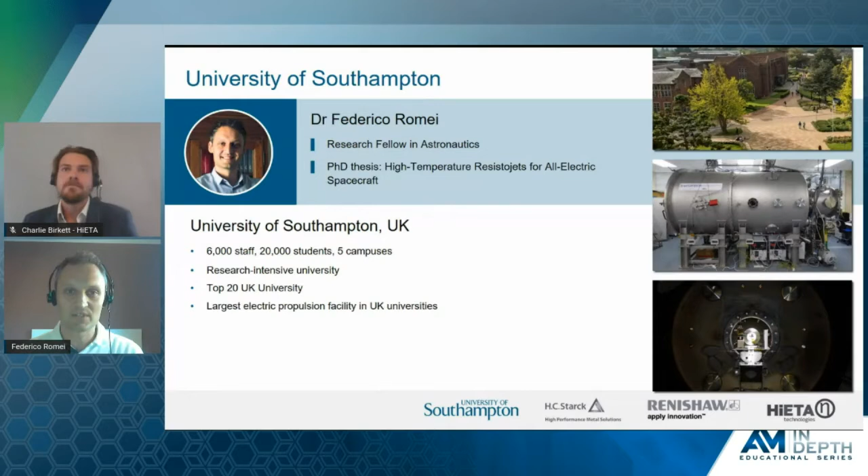Okay, so still Federico here. I'm going to introduce myself very briefly. So I am a research fellow in astronautics at the University of Southampton. As I said, my PhD thesis was on high temperature Resistojets. In particular, we looked into all-electric spacecraft, which is a kind of satellite platform.

The University of Southampton is quite a big university, in the top 20 in the UK. There are above 6,000 staff, students are more than 20,000. There are 5 campuses, one in Malaysia and the other in the city of Southampton. The good thing about the University of Southampton, from my point of view at least, is that it is very research intensive, and we have some of the best capabilities and facilities in the UK.

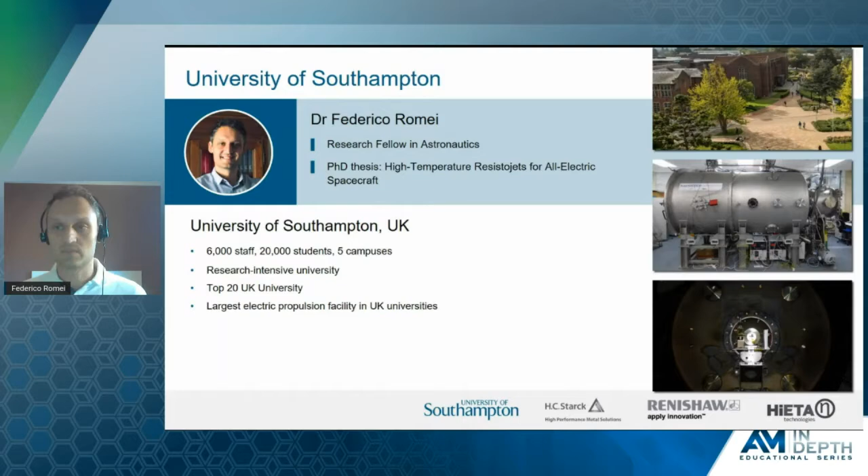In particular, we have the largest thermal vacuum chamber in the UK, which is the one that you see here on the right in the center. And this really is the kind of space simulator that we use to test and qualify the Resistojets, and not just those ones, but also other electric propulsion systems that we research into in our research group.

So here, I just want to tell you why electric propulsion, so why Resistojet. Simply, electric propulsion allows you to have a much lighter platform, which means that the launcher has to launch into orbit a much lighter amount of mass, which is cheaper.

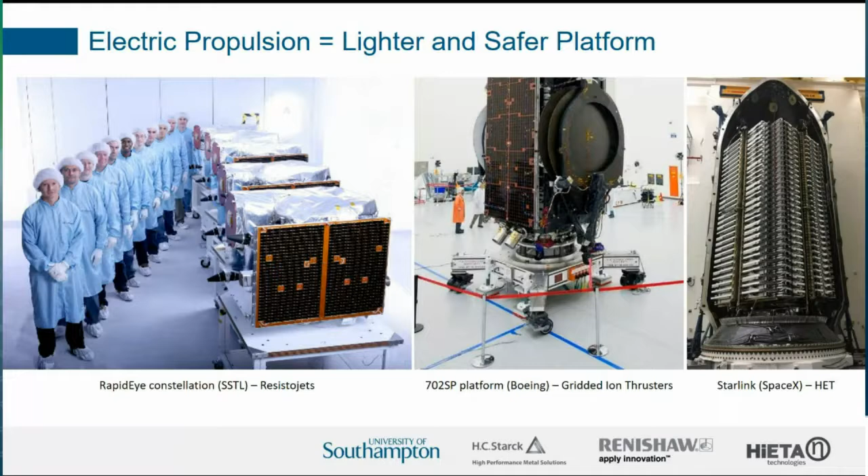Okay, so electric propulsion came into play already really at the beginning of space commercialization since the 80s with the Resistojets. So here you can see on the left an example from Surrey Satellite Technology, which is also a partner of this project. They have a very long heritage with Resistojets.

So here you go with the constellation from Surrey Satellite. At the center, you see instead another example of electric propulsion, in this case for a much larger platform for geostationary. This is from Boeing and uses another electric propulsion technology called gridded ion thrusters. On the right, you also see another example of implementation of electric propulsion from SpaceX, the Starlink constellation. In this case, they use another technology in electric propulsion called the Hall effect thruster.

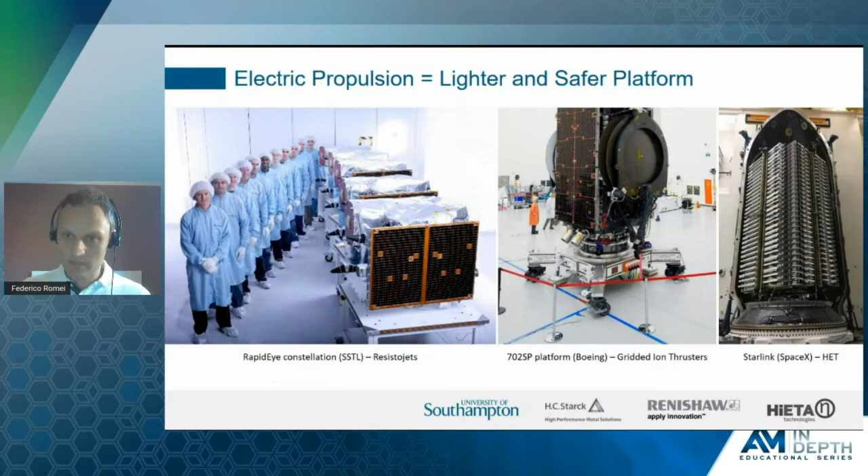But now we need to focus on resistojets. So why do we want to print refractory metals? Because they can achieve very high temperature, and in the resistojet world, high temperature corresponds to high performance.

So if you look at the equation here, this is the equation for specific impulse, which is like the performance, the speed of the system, the performance parameter. Once you have, like here, there's gravity, here's the specific heat of the propellant, and here the molecular weight. So if you consider just one single propellant, then the only way to increase this performance is to increase the temperature.

So really, it is very simple to think that you can increase the performance of a resistojet by just increasing temperature. In particular, from what SSTL, our partner, has achieved — they can get to 800 Kelvin of temperature — we wanted to achieve much more, like beyond 2000.

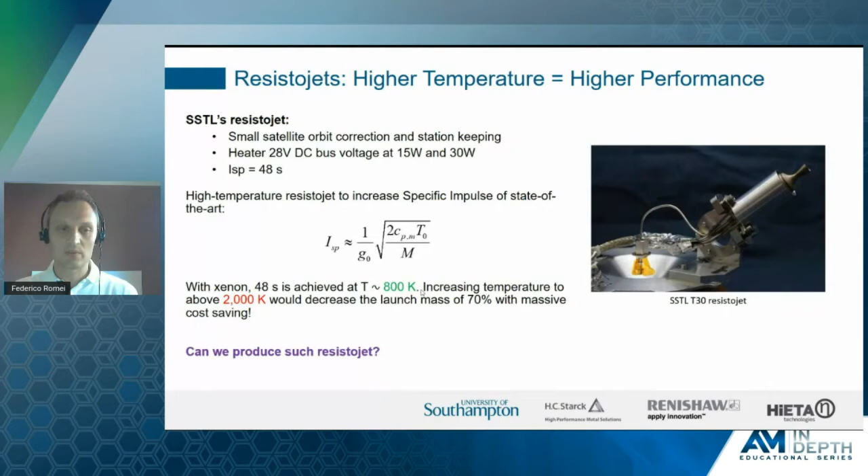In this way, we can really reduce the mass of the spacecraft by 70% and have massive cost savings. So now the question is, can we produce such a resistojet?

As I said in the introduction, we found a very interesting design in literature from the 60s and 70s, from a company that was collaborating with NASA on developing a very high temperature resistojet using hydrogen. The concept is pretty much what you can see here.

What I've done during my PhD is to simplify the manufacturing process using additive manufacturing. So this is the heater that you can see here, the first prototype in stainless steel. Basically it consists of a number of tubular elements that are concentric, and these are interconnected with some features inside, and this forms an electrical resistance.

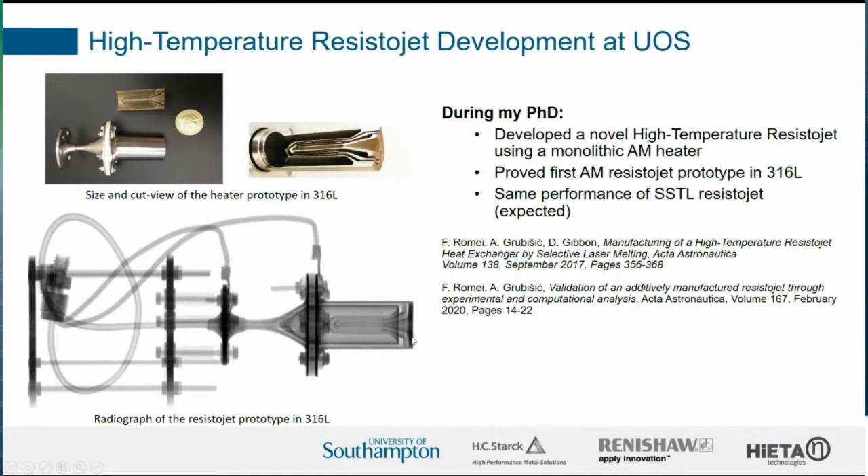At the same time, you have the propellant, and you can see here from this radiograph that the propellant flows from the outer part of the resistojet and then recirculates inside thanks to these tubular concentric elements. Then it's heated by the resistive heating, and at the inlet of this trumpet nozzle, you have expansion of the gas, and this produces thrust. So we have been able to make a prototype in stainless steel to demonstrate it.

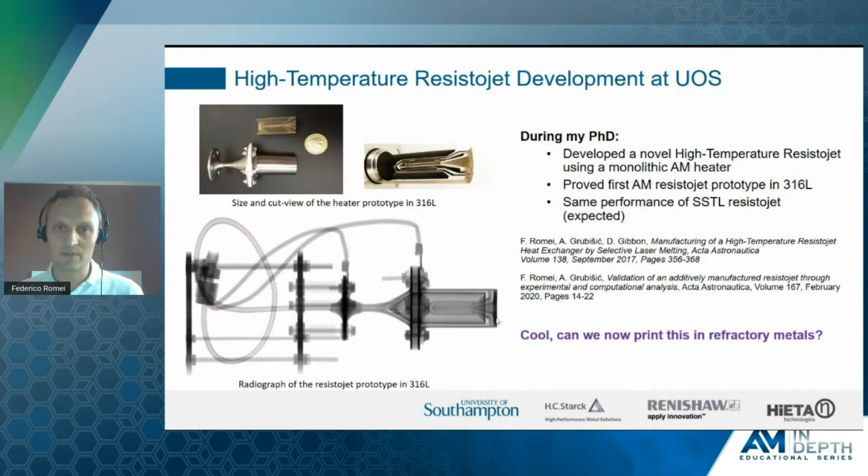But then the next step was, can we use refractory materials? Can we really achieve the goal of above 2000 K temperature?

To do this, we built this consortium. Angelo made this possible with a project of 2 years funded by the UK Space Agency called Super High Temperature Resistojet for All Telecommunication Satellites. The goal is to design and test an engineering model of the resistojet, moving from prototype materials like stainless steel to refractory metals.

The consortium is formed by HC Starck, that provides the refractory powders, then HiETA, that has Renishaw technology to print these refractory metals. We provide the designs, and effectively we also do qualification and testing of the resistojets. We also have Surrey Satellite Technology in the consortium, which provides us with real mission requirements for the platform, and Satellite Applications Catapult, which provides us with standardization and secure supply chain strategy.

So in order to do this, the first thing that we need is refractory metals. And here I pass it to Paul.

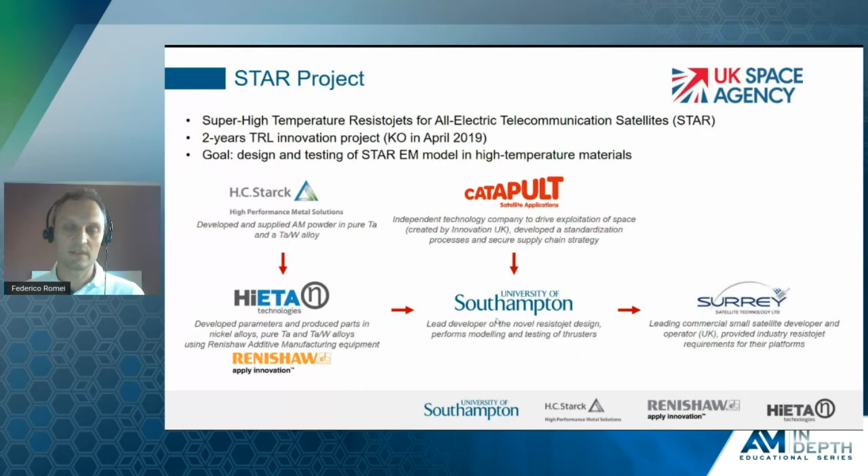Again, my name is Paul Aimone. I'm a senior engineer at HC Starck's Newton facility in the United States. I've been working here for roughly 21 years, so I have a great deal of experience with refractory metals in these types of applications.

Traditionally, Starck is a supplier of refractory metals in traditional forms, and we've been working on additive manufacturing components and powders for at least 7 years now. We supply all the refractory metals, tungsten, molybdenum, tantalum, and niobium in powder form. We have global resources to help us with the distribution of the powders, specifically for this program, to get them over to HiETA for the powder building in their systems. And we have extensive support facilities, both in research, R&D, and other traditional processes for the refractory metals.

But now I'm going to move on to the objectives of this program for our company and for the program itself. Overall, as Federico has indicated, improving the performance of the resistojets, reaching the goals that they have, is going to require refractory metals. So one of the big goals is to develop a new alloy.

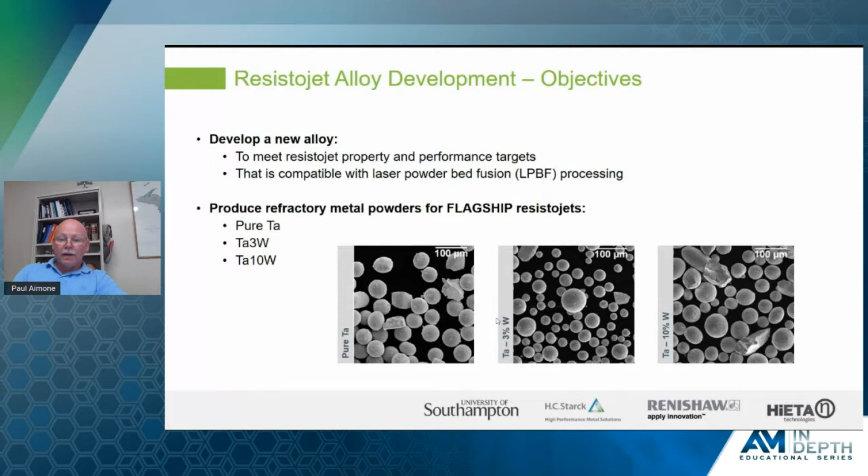So we need an alloy that operates at very high temperature but is still very strong, because there are mechanical stresses involved from the firing of the Resistojet, plus thermal cycles as it goes from operating temperature down essentially to zero due to the very cold temperatures in space.

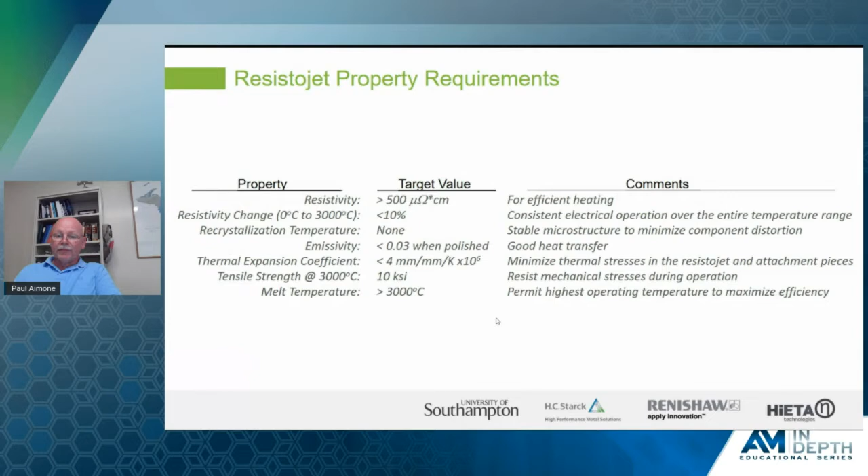However, there are two: the tungsten 4 rhenium alloy and the T222. The latter is a tantalum tungsten hafnium alloy. These show the most promise as a starting alloy for further development.

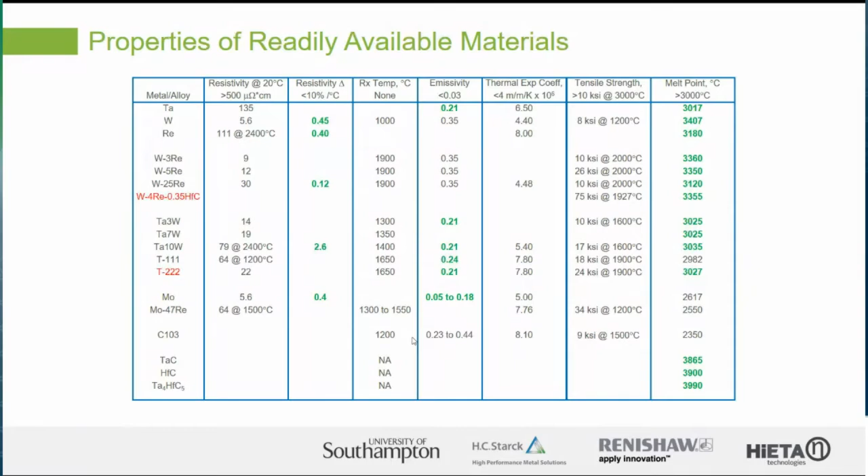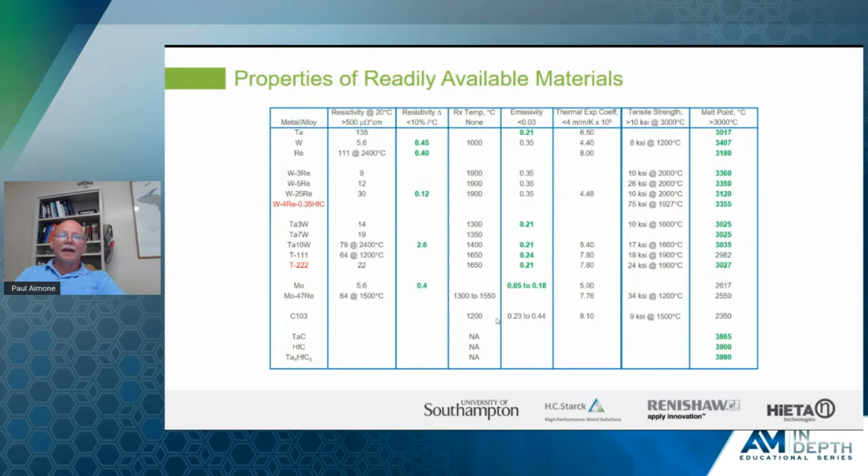For those familiar with AM or powder bed processing of tungsten, you'll know that's very difficult—there tends to be a lot of cracking. And we'll see shortly that it's much easier to produce solid components in tantalum. So there we have a competing set of requirements that we're hopefully going to work our way through to give a Resistojet in the highest performing refractory metal we can.

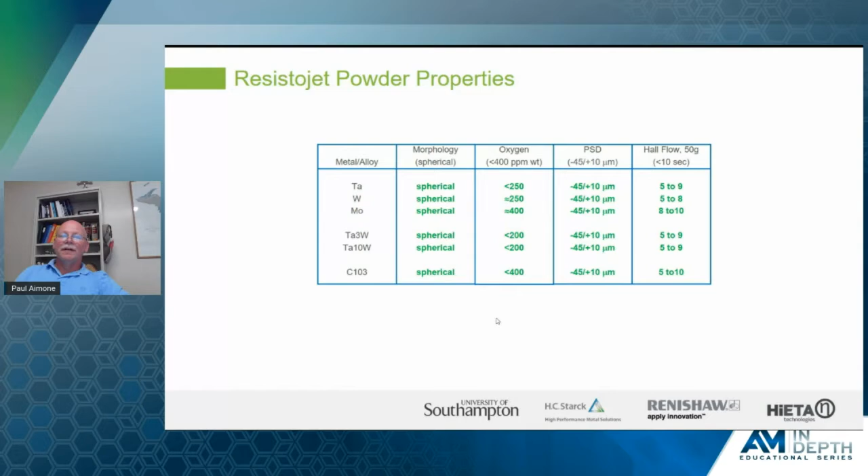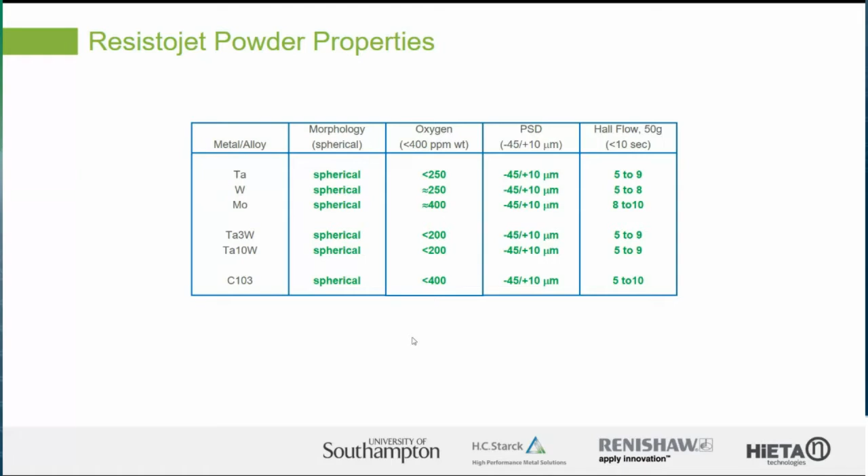For the program, as I said, we make many refractory metal alloys. You can see the requirements we've put together for powder bed laser powders, based on industry requirements. We really have no trouble producing any of the alloys listed, and would be able to supply any of these and offshoots of these for the project itself.

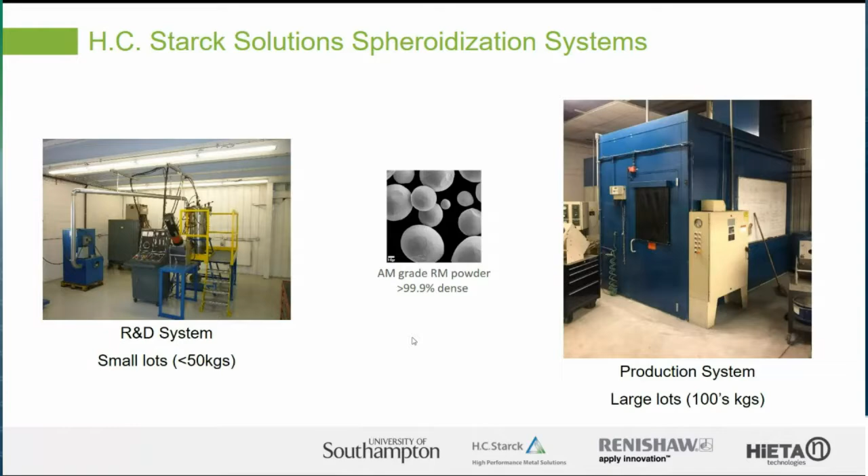These powders are produced internally. We're using two systems to produce powders for this program. We have a small R&D system which can produce small lots and specialized powders—a lot of the work has been conducted on that unit at the moment. And we've brought online a larger production unit to supply much larger lot sizes when we begin producing Resistojets in larger numbers.

So having the powders, we can then use these in the AM environment, and John Laureto is going to talk to you some more about that right now. Sure, thanks Paul, much appreciated.

So guys, as Brent had alluded to, I function as the Additive Manufacturing Group Americas Operations and Applications Manager for Renishaw Inc. My background is in material science and engineering. Functionally, I've been in metal additive for probably about 6 or so years. I started on the service bureau side and then migrated over into the equipment manufacturer side.

So pretty well versed in the technology overall from a user and manufacturer's perspective. Renishaw is quite unique relative to some of the other equipment manufacturers out there, in the sense that if you look at the company's history, we have a core competency in the design and manufacture of precision metrology equipment. That comes across in other areas of our business outside of additive—things like our CMM, machine tool, and Equator divisions, which are typically more leveraged in the subtractive side of the business.

But I'll get into the additive stuff and where those two touch up in a little bit. We also have expertise in optical-based measurements, which comes into play with things like our laser interferometers for precision machine control and alignment. That's mostly for subtractive technologies, but it'll come full circle again.

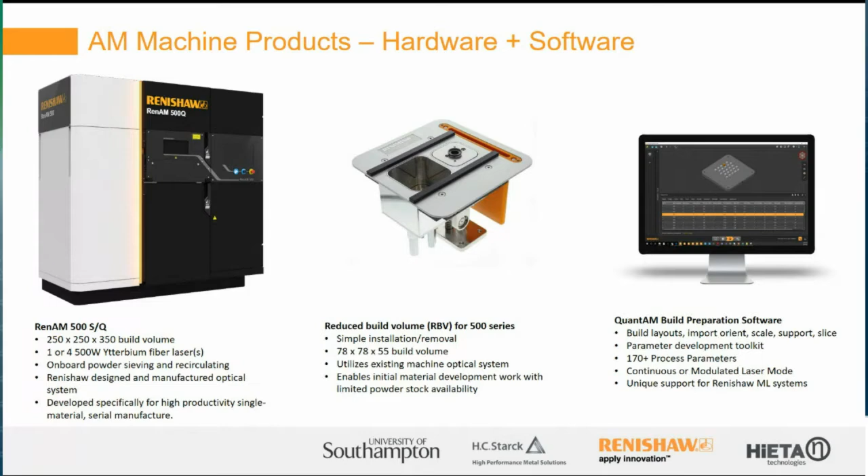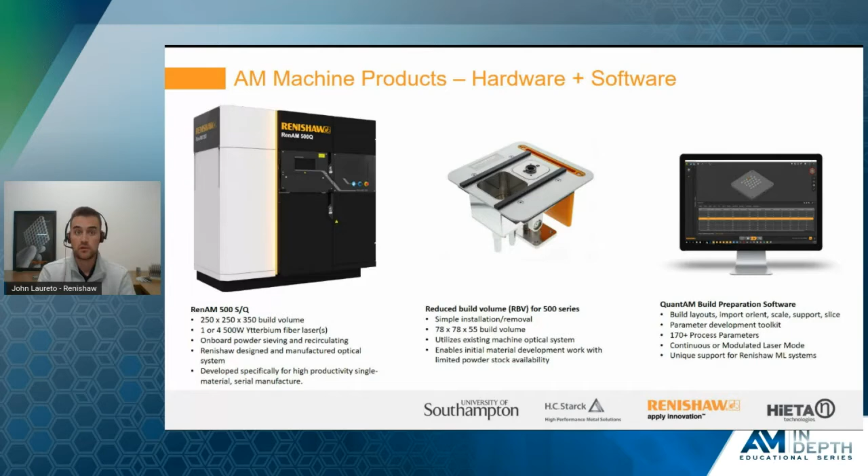And they can functionally leverage this tool, the tools within QuantAM, to manipulate any build processes they may need to work with to help develop the system, the alloy, and even the design in some circumstances. In conjunction with that, it also offers some clever utilities for multi-laser assignment, which can get interesting relative to metallurgical control, especially with refractory alloys.

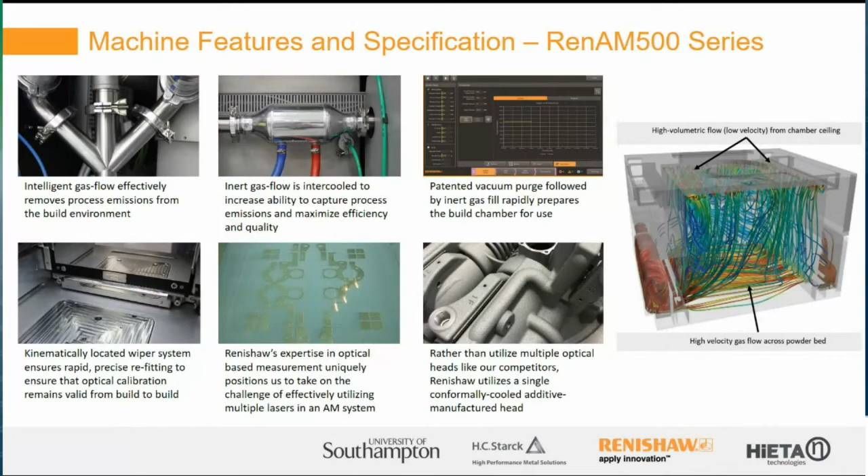There's an air knife that rides adjacent to the build platform, which helps evacuate and remove all that spatter, condensate, and other particulate media away from the system. That gas flow is inert, typically leveraged with argon gas, but it's also intercooled, maintained nominally at about 20 degrees centigrade. This allows us to maintain good thermal stability of the platform, and generally speaking, things condense more readily in cold air versus hot, so that's a good little thing.

The system itself also has a vacuum purge. To fill the vessel by itself is about 1,000 gas liters, but it would obviously be substantially more to push out all the air in the chamber during the prep process if we weren't to have a vacuum pull down prior to introducing any argon into the chamber. So that's pretty clever from a runtime capacity. The machine can be ready to go in about 10 minutes when you hit the go button, down to even like 500 ppm or less.

One of the more clever things, and these even harken back to some of the stuff we've done with all of our other industrial metrology products, like our touch trigger probes, is they're all based in the science of kinematics, kinematic loading and unloading. The wiper blade in our quad system is similar to that. It would be the same in both the RBV and the full scale platform, in the sense that there is no operator intervention relative to leveling the wiper system. The optical control and the leveling of the optics are based upon a hard-coded position based on where the kinematics are located. So the wiper mechanism itself can be loaded and unloaded with a couple set screws, or springs rather, so it's a very quick turnaround process for the operator.

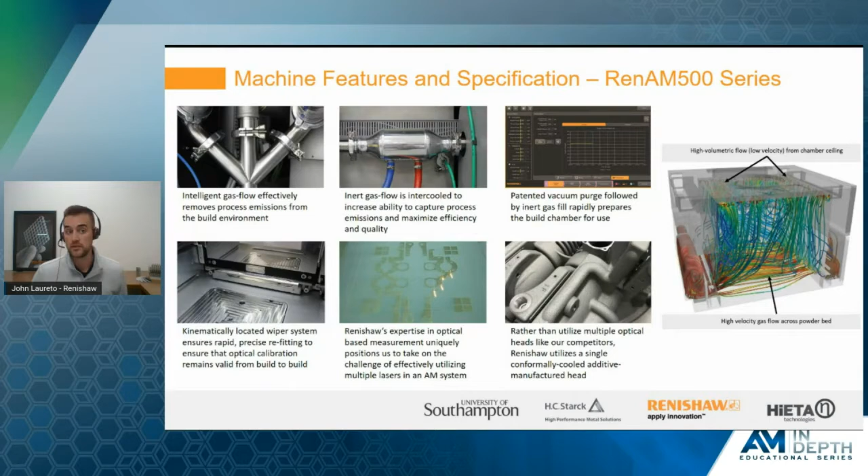And then the last two images there, functionally, like I said, we do design and manufacture our own optical module. What that has allowed us to do basically is have all four of the lasers in the quad version of the system isolated very close together, which allows us to maintain the same optical temperature across all the lasers. And moreover, there's no stitching phenomena relative to their addressing of the bed platform, because each of the lasers can address any portion of the substrate at any given time based upon the output demand that you program into QuantAM, which is a software I'll talk about next.

So much like a lot of build setup softwares, QuantAM does a lot of the pretty basic things relative to metal additive, what you would expect a slicing utility to be able to do. You can import, orient, scale, label part geometries as you import them into the software. There's a couple of utilities built into the functionality of the tool for support generation. QuantAM will leverage what's called column supports, a pretty common node-to-node type support generation based upon overhang threshold limits that you define within the software. You can kind of see some contour maps of that shown in the upper middle image there.

And functionally, once you do design the build layout, it starts to give you a few more clever tools associated with how much exposure cross section you're going to have per layer. Therefore, that drives how much laser on time you're going to have per layer, which allows you to start to think about this in a bit more holistic manner relative to manufacturing efficiency, laser on time versus wiper on time. And even things about abrupt cross-sectional changes, which will drive thermal histories, which can lead to things like cracking phenomena or shift lines in the part.

One of the more powerful tools, that Charlie will touch on later in the presentation, is the developmental protocols built into QuantAM. Its bread and butter, in my humble opinion, really is its ability to rapidly iterate between parameter sets and any developmental protocols for new alloy systems. There's over 170 parameters within QuantAM. The common five are power, hatch distance, exposure time, layer thickness, and point distance, relative to how you excite the laser onto the bed.

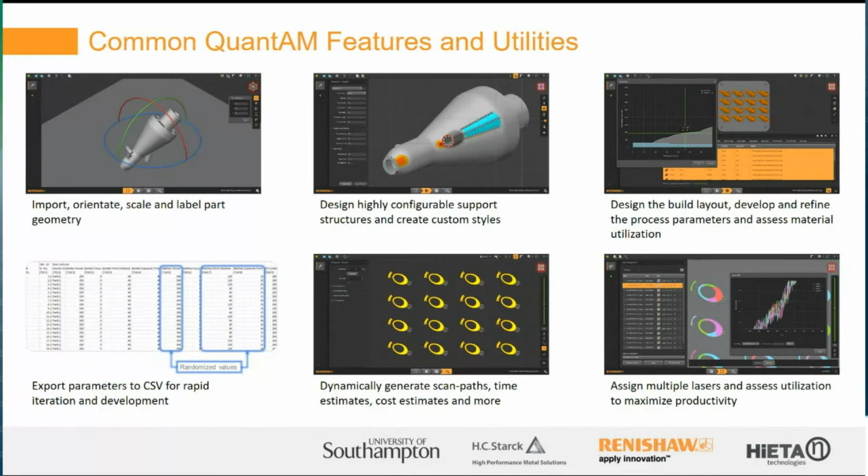Once the parameters are defined, you can create scan paths relevant to the parameters you defined. It's either going to be single or multi-laser based upon what the application area is. In the multi-laser approach, you're going to be trying to ensure uniform utilization of all the lasers across the bed. That's where available cross-section comes into play, because cross-section is going to drive laser on time, and therefore maintaining uniformity across those multiple lasers is really important.

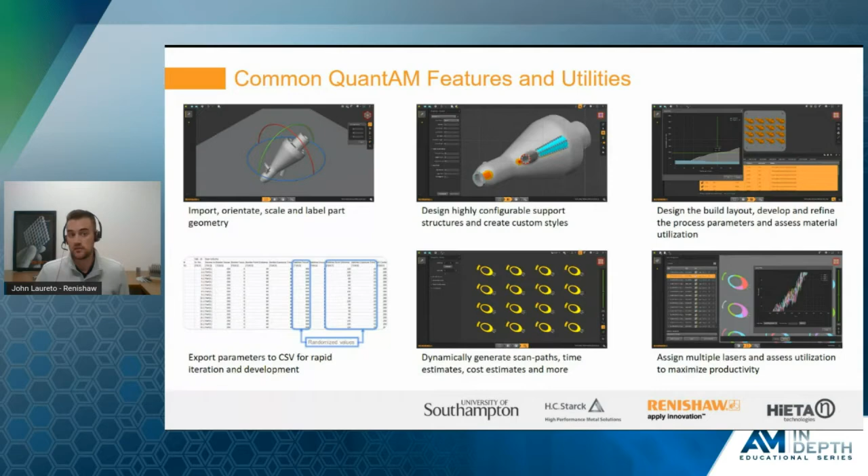That's really all I wanted to say about QuantAM. There's a lot of tools. If you have any questions, let me know, and I'll pass it on to Charlie, who talks about actually using the software.

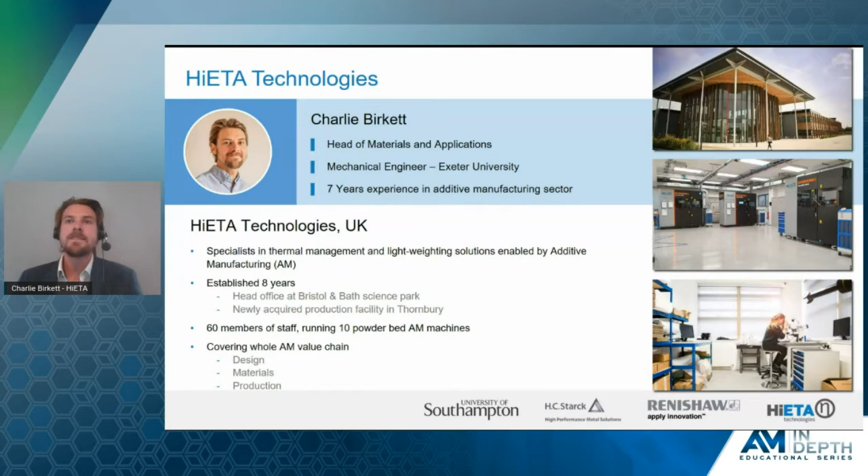We cover the whole AM value chain for our customers, so focusing on design, materials, and production. Design teams looking at 1D modeling, computational simulation, so CFD, FE, topological optimization, and all designs they do are validated through our in-house testing. The materials team, which is the area we're looking at today, is...

...most part of the Resistojet project. And we've got an overview of our development process here, which we've applied to the STAR project here today.

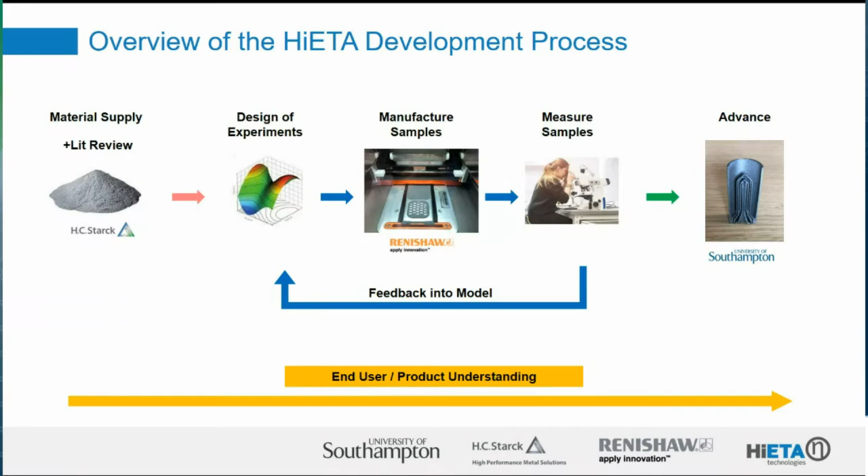So powder comes in from HC Starck. We'll check the powder, conduct a literature review if needed, and start building our design of experiments using Minitab and QuantAM, as John mentioned. We'll manufacture samples, measure those samples, starting on a small scale, usually starting with bulk density and scaling up from there. So iterating through the process and always having that end user and product understanding, in this case the Resistojet, in mind, to advance those developments forward.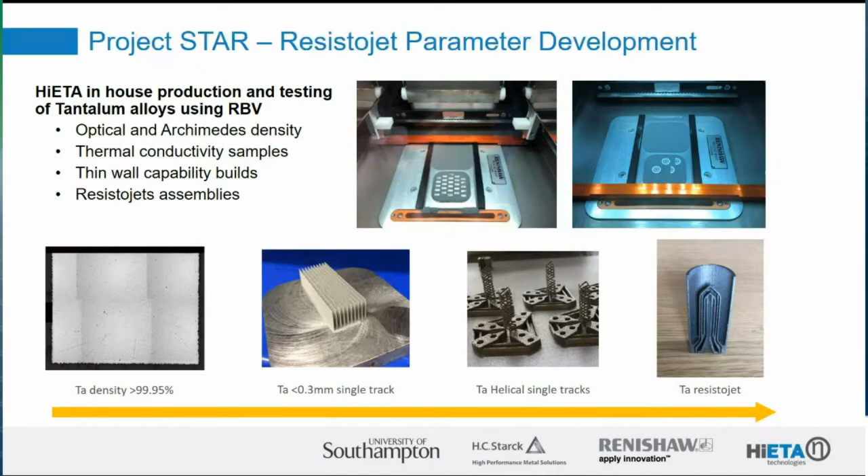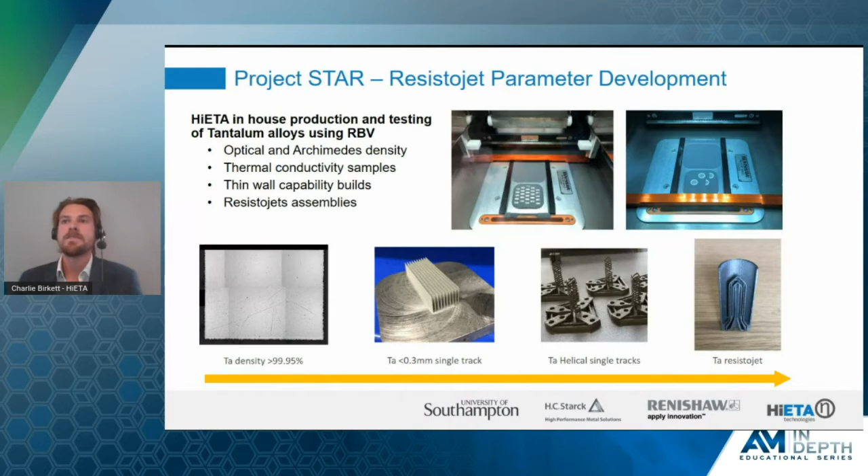We then move on to more complex geometry. So we've got some single track scanning helical structures there, and again building still on the RBV platform to eventually producing some successful tantalum Resistojets and tantalum alloys as well.

So moving on, what's next? Before we go to Federico, who's going to talk about some of the testing done on those delivered units, it's probably time we start thinking about scaling up and moving off the RBV. And thanks to the scalable architectures that we have at HiETA, we'll be moving from the RBV into a full build volume, and then looking at the other processes involved.

So this is really HiETA's pedigree here. We've got the validation of the material parameters that need to be done on a full machine, and looking at how the powder is going to be managed. We have some in-house machine calibration techniques for single and multi lasers that we've developed to make sure we're happy with the quality of the processing and, I guess, locking down streamlined processing on the machine.

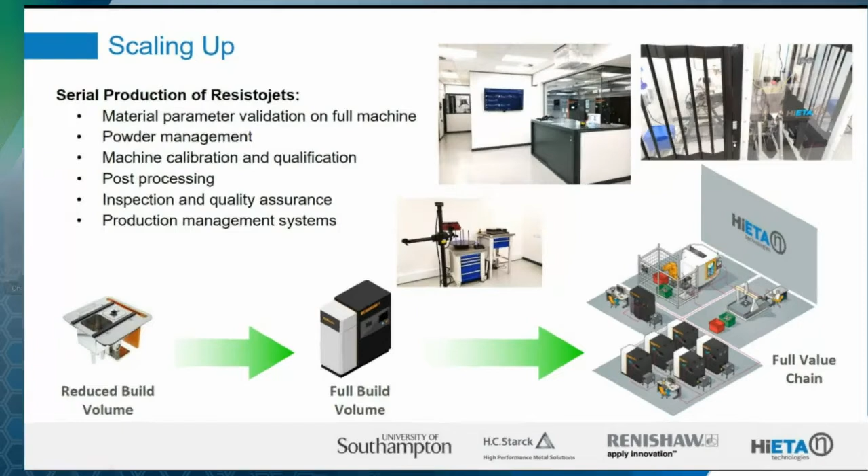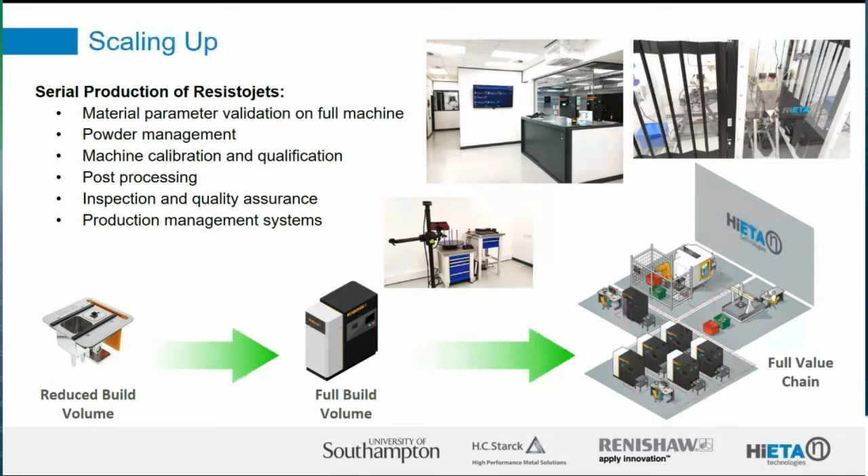Post-processing wise, we've also got - you probably can't really see, but in the top right-hand corner - automated powder removal rigs, and HiETA have addressed a number of points down the post-processing chain that are specific to the products we produce, ensuring we've got the best post-processing as well in-house. That includes inspection and quality assurance. And finally, we've also got HiETA designed quality production management software to trace parts around the building using QR codes and formal routing of parts.

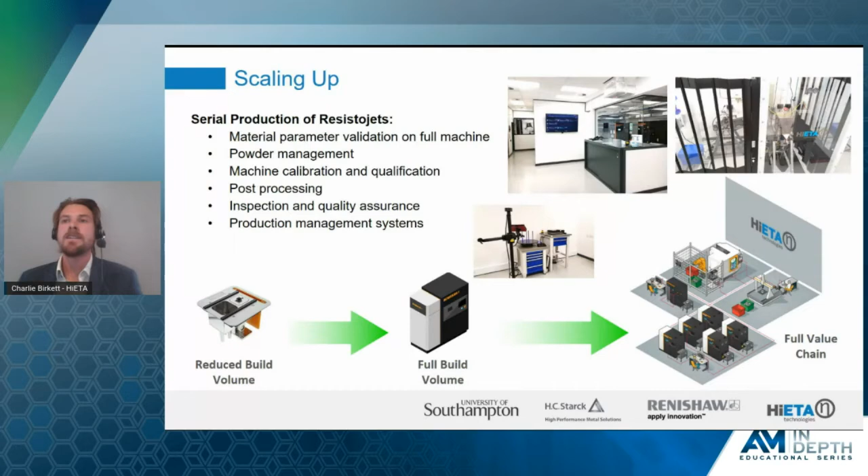Thanks. Yeah, so what about the testing then? So we have the parts, we test them, and we soon find out that the models we have been working on produce quite different results from the experiments.

So here on the right, you see an example of multi-physics simulation of a resistojet, where you have the solid wall of the heater, and the fluid going from the inflow, recirculating, and going out from the nozzle. You can imagine that's a lot going on here.

There are two main aspects of physics we need to model very carefully. The radiation, thermal radiation—these elements are at very high temperature, so depending on the surface emissivity, you might have a very different solution of this thermal model. Surface emissivity is a key parameter to know.

Secondly, this is a resistive element. For instance, you have an electrical potential applied to terminals, and then you have a flow of current by Joule heating, or resistive heating, as you wish. The structure heats up, so you need to know the electrical resistivity very well.

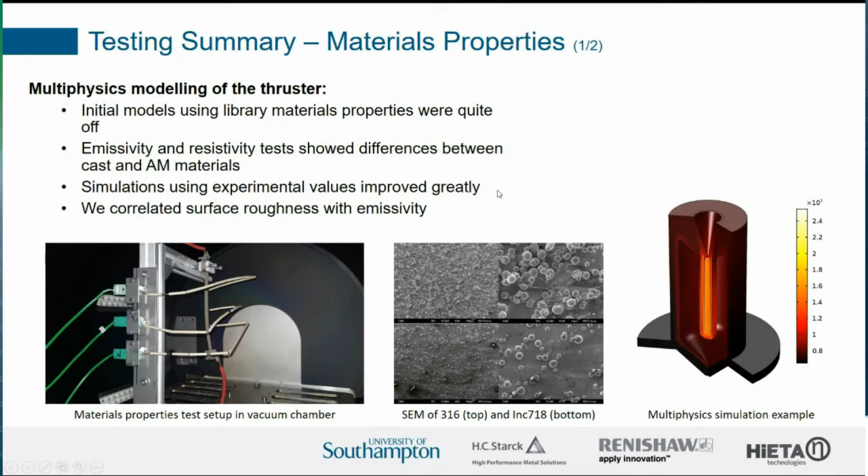So that's what we've done. We have performed some tailored tests for AM materials to measure these two properties of the metals.

And also we correlated, in particular for emissivity, that with the surface roughness. On the left picture, you can see a setup in the thermal vacuum chamber of a strip of 3D printed metal, instrumented with thermocouple. This is like a typical ASTM standard for measuring surface emissivity.

And the center figure shows some SEM pictures of the surface of 316 stainless steel and Inconel. And basically, we combine all of these into our parameter research.

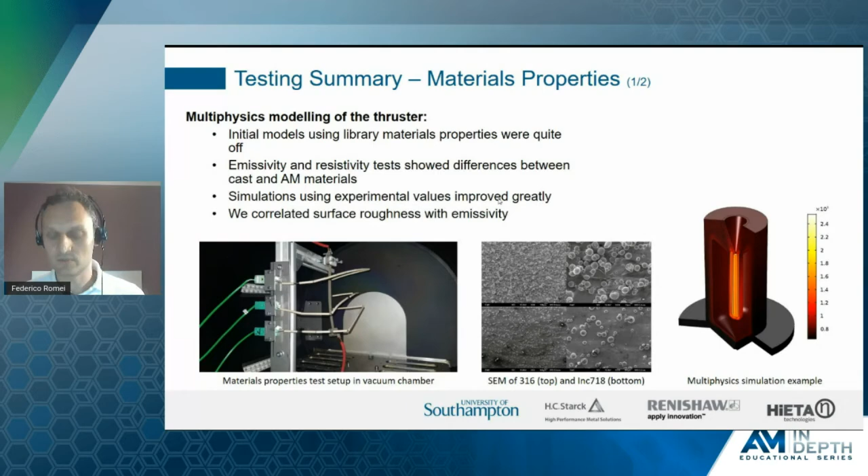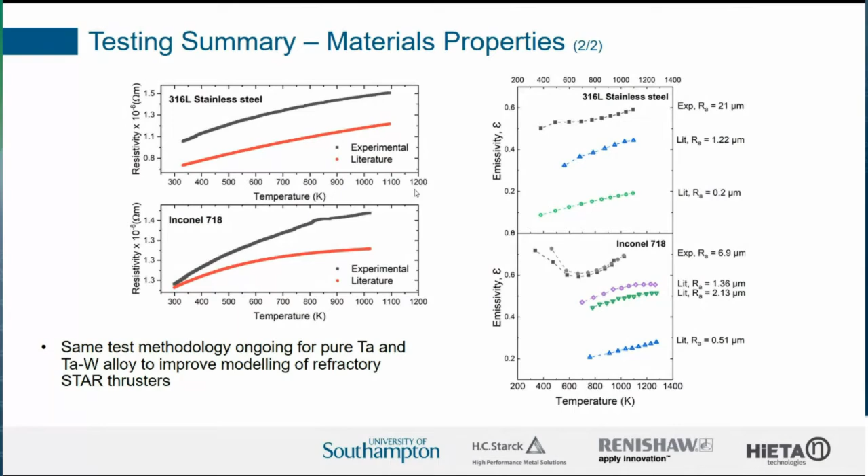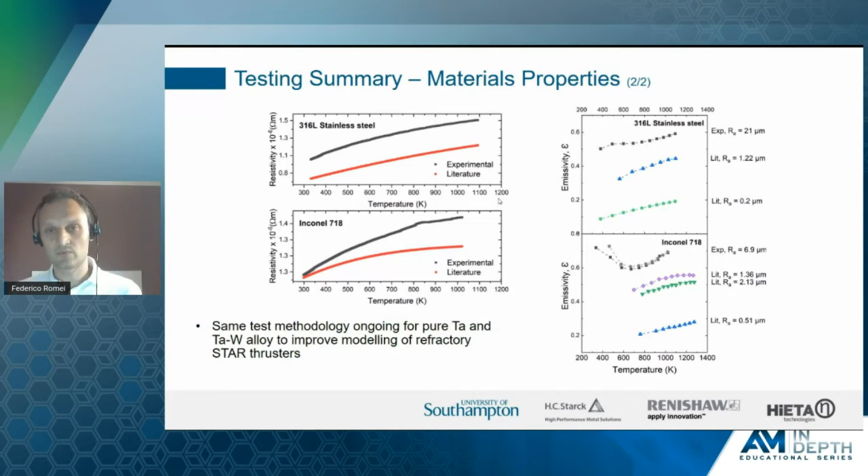So we are conducting similar, same test setups for the refractory metal, both pure tantalum and tantalum-tungsten alloy. I want to stress that we didn't do this just to improve the models, but to then be able to use those to optimize the design of the resistojets and really achieve the maximum possible temperature of the gas.

We've done this both for Inconel and we are doing it for refractory metals. The goal is to demonstrate that this heater can hit the requirements for a typical mission. In particular, we've been given requirements from SSTL for lifetime, roughly corresponding to one maneuver per day for seven years of operation.

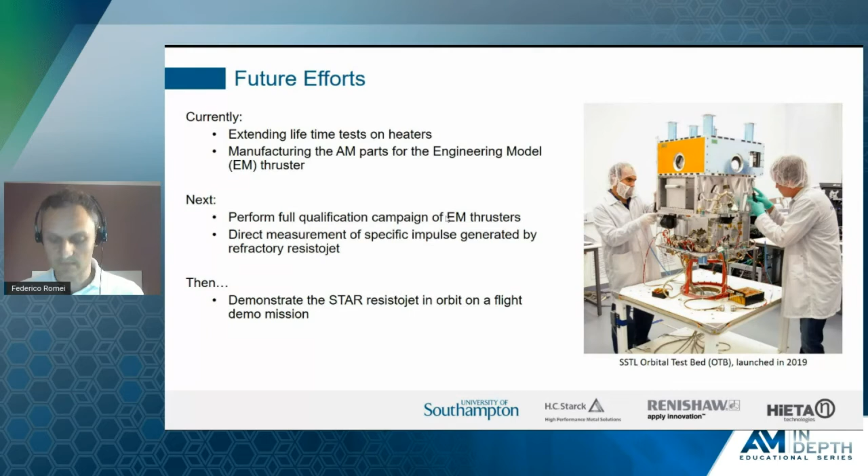So the next step at the end of this project and with this big collaboration is to launch it - to put a STAR resistojet into space on a demonstration mission and prove it in its own operational environment. Thank you for your attention, and now we can answer your questions.